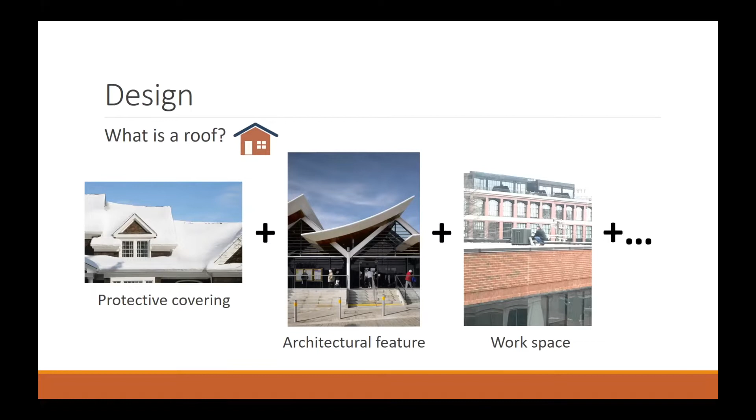Let's start off a little bit more with some background information and just talk about design. That's what the focus of this presentation is primarily, it's about design and how we see design and its impact on our lives.

First of all, we recognize that design is a powerful ability where we can build wonderful things, whether it's the Empire State Building, the Golden Gate Bridge, or Hoover Dam. Wonderful things that we've built throughout our country and our society that benefit us in many different ways. We have the power to do many things through design.

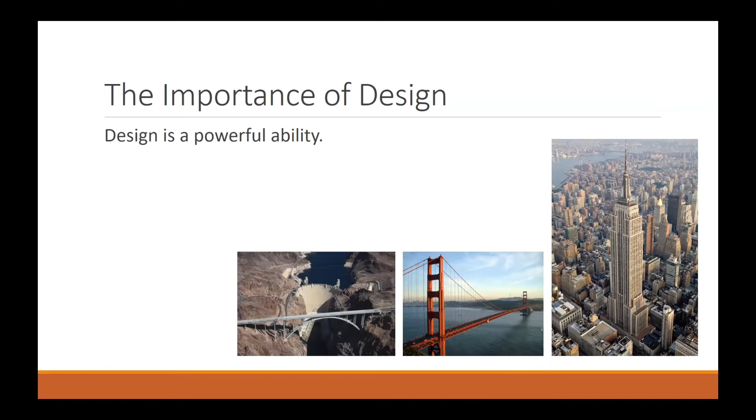Along with that, we have to realize that good design demands attention. As you can see in the photographs, the designs perhaps are not the best designs, right? For the homeowner, that driveway is a little bit steep. For those stairs, it's very hard to see the stairs, so they're fairly dangerous. Or the air intake is right next to the exhaust, and you wonder who designed that. A little quote there from Francis Bacon, but predominantly we need to recognize that if we don't think about our design, something could go wrong. So we need to pay attention. If we don't, we will create designs that don't work or perhaps are unsafe for us.

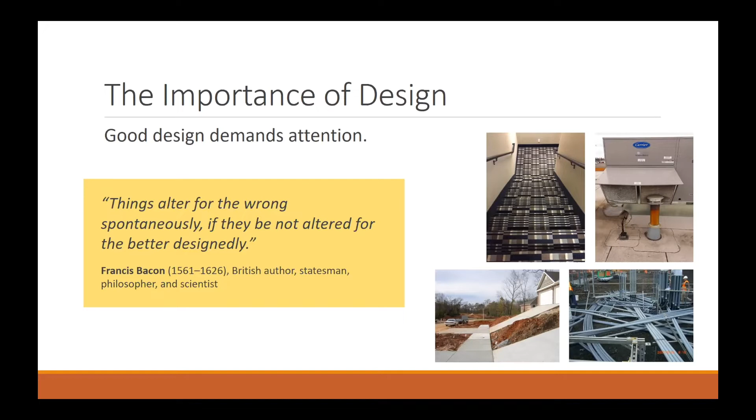Next, we also have to realize that design influences project success. How we design our building or a bridge or a road, whatever it might be, impacts the success in terms of cost, schedule, quality, performance of that design, safety, and so forth. The ability to influence that project success, as you can see in the chart, is very high early in the project during conceptual design, detailed design, and so forth.

Later on, we have less ability to impact project success. Also, the cost of making changes is greater later in design. If we are going to change the design to improve it, the cost is going to be greater if we are in construction or later on after construction.

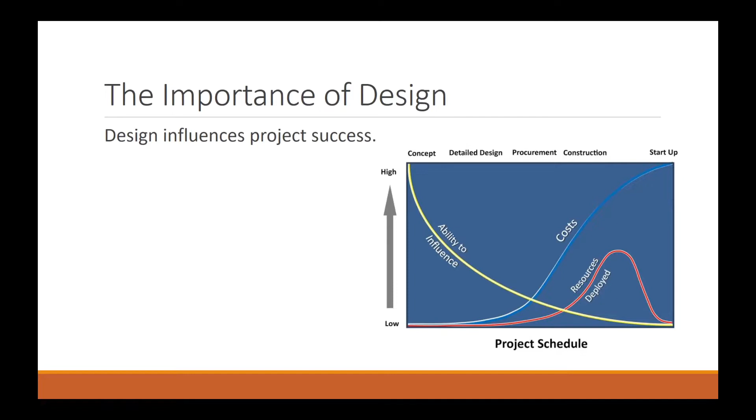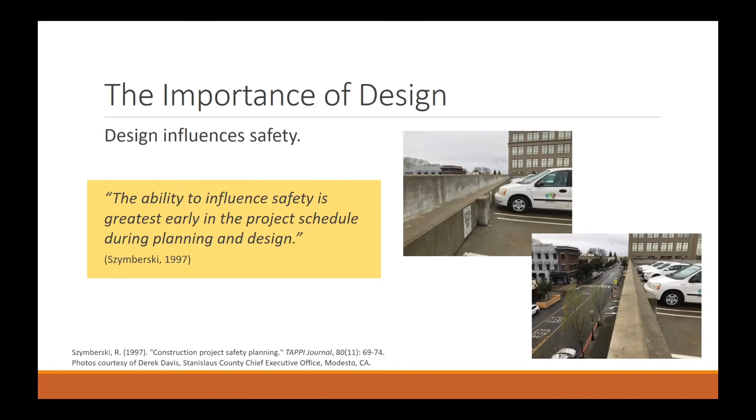In that vein, design influences safety as well. As you can see in the quote, the ability to influence safety is greatest early in the project schedule, during planning and design. As you can see in the photos on the right, this was taken from the top level of a parking garage, where on one side of the exterior wall is the street down below, and on the other side is perhaps a place where someone could stand, a little child or anybody, and be exposed to a hazard down below. So that falling hazard is created due to that design. An example of how design influences safety.

That brings us to this concept of prevention through design. This topic has been around for a number of years. NIOSH, the National Institute for Occupational Safety and Health, has put together a definition to recognize what prevention through design is. NIOSH focuses on all industries, not only design and construction, but agriculture, mining, manufacturing, and so forth. So this is a very general definition, but it's basically the effort to design out hazards to workers before they exist. We're going to look at the facilities, the methods, the operations, processes, and equipment, before they are there on the work site or in the workspace, and design them out.

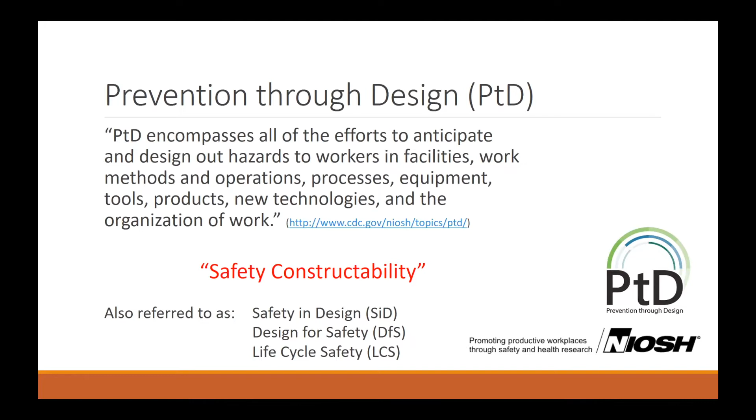I call it safety constructability for the construction industry. You can also read about it in terms of safety in design, design for safety, life cycle safety. Those are similar terms we've heard over the years. So prevention through design is not a new concept. In fact, it's been around for many years.

Here's an example. Perhaps you've visited this site in Wales. It's described on the World Heritage website, listed as one of the World Heritage sites: the Pontcysyllte Aqueduct and Canal in Wales. You can see a couple pictures of it there and some original drawings. What did they do on this project? Well, the documentation describes that the engineers gave unusual attention to the safety of the workforce. They designed in wider piers so that workers could get around the work site a little bit easier, and they also designed the upper sections to be hollow so that they were a little bit lighter and could be handled a little bit easier.

So we've had this concept for many years, and we understand what it is. It's being implemented now, obviously, but maybe not to the extent that we would like. We are trying to develop resources and things to help the industry implement this concept.

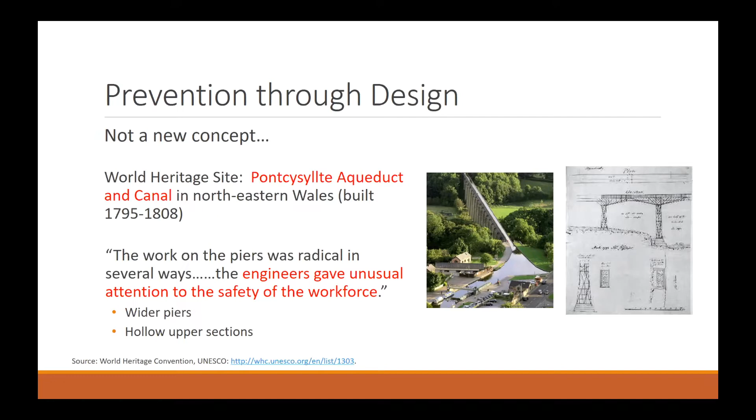Importantly, we have to recognize also what PtD is not. When I give presentations, people always talk about means and methods, and architects and engineers participating in safety during construction and responsibility for safety. Well, what PtD is not is those three things. It's not a suggestion that architects, engineers, or designers should participate in safety during construction. They're not there to provide that guidance to the contractor or the workers, and they're not prescribing the means and methods of construction.

That's up to the contractor, rightfully so. They have the contract for that, it's part of the contract, and they have the knowledge, right? When I was an engineer, I didn't do that. When I was a student a long time ago, I wasn't taught anything about safety on construction sites. So it's also not something that suggests the architect and engineer bear a responsibility for worker safety.

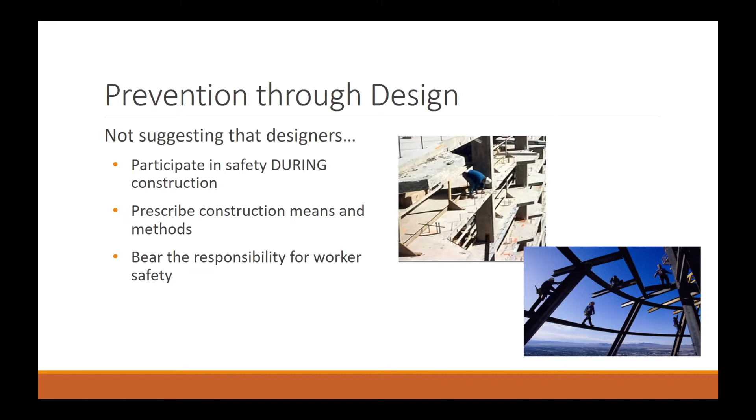It's simply, as I design something, think about how that design impacts the people who are building it, maintaining it, using it, all of those, and maybe change the design in a certain way so that it's as safe as possible for those three parties. So it's basically making safety pre-thought, not an afterthought, as we see in this figure here, moving it back upstream to design, to the conceptual design, detailed design. It's easier to do it at that part of the project, and it costs less.

Now, that's not to say that there isn't an important part for safety during construction as well.

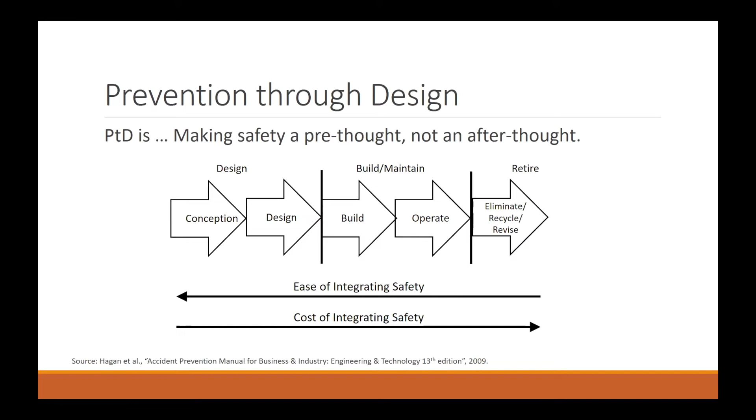There certainly is a big influence on safety as part of the contractual requirements and as part of the work operations. So there's a big impact there, but we also have an influence of the design on safety too that we have to address, and we can promote better safety during construction, during use, and during maintenance of our facility.

There are a couple important questions that may come up, and I wanted to address those: what is being designed, and whose safety is being considered. As you can see in the table on the left-hand side, there's a list of things we perhaps design: the permanent structure or equipment, or maybe the temporary structures or the process of constructing, and the equipment we use during construction.

On the other columns, we focus on whose safety we're targeting. Is it the safety of the constructors, the safety of the end users after the facility is built, or the safety of the maintainers, or all three?

I wanted to address this quickly to focus the discussion on where we're struggling and where we need to put more attention. First, we need to recognize that the end users, operators, and maintainers don't really get involved with the temporary equipment, the temporary structures, and the construction work process, so that's not applicable.

The end user and operator are very much affected by the permanent works, the structure, the facility, the equipment. We actually do a good job here—we have building codes, lots of standards and regulations. That covers the safety of the person in the building after it's built, driving across the bridge, or working in that industrial plant.

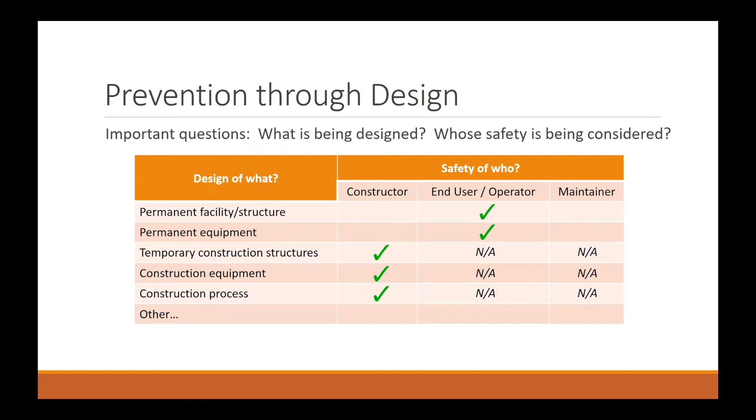What we don't do a good job at, and where most research focuses, is designing the permanent structure or equipment for the safety of the constructor or the maintainer. That's where most of the research going on today is focusing—how do I design a column, the rebar, or the layout of my facility to make it safer for those who build it?

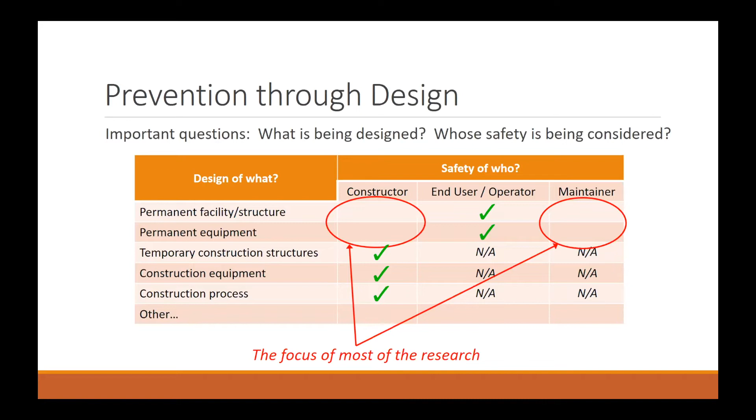As part of its life cycle, the facility impacts people differently, whether partially built, in its final form, or when it has to be maintained. That's where I get involved in much of my research, and where, if you read some journal articles, people are targeting. Let's dig a little deeper into that—I want to show you some examples.

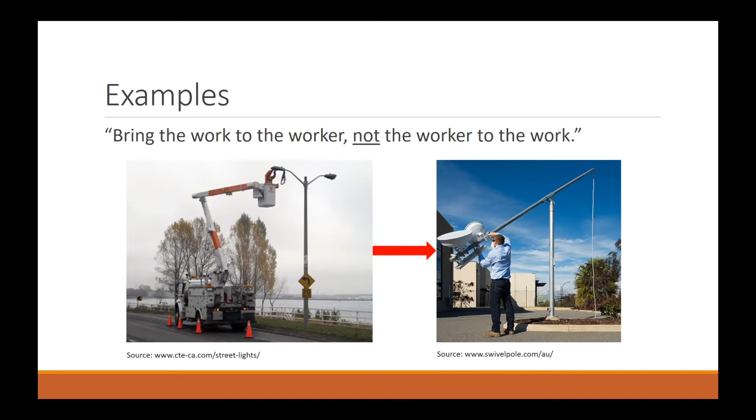Maybe you've seen something like this. It's fairly easy to recognize: bring the work to the worker, not the worker to the work. As you can see, the worker is up in the man lift trying to replace that lamp, which creates a hazard—there's passing traffic, plus being up in the air at elevation. Why not design that lamp post to rotate down, so a worker can simply change that bulb right on the ground? That's a good example, and it can be applied to lamp posts or any type of work or design within our facility.

There are quite a few other examples. I'll show some pictures here, like color-coding the piping in the upper left, so we can readily see what's in the pipe. If I'm doing work during commissioning, some rework, or maintaining that facility, I can easily tell what element, liquid, or gas is in the different pipes.

The center one there is something I call mistake proofing, or poka-yoke, and that is designing something so it can only be used in the right way. We can only put that plug in one way.

In the bottom picture there, the red concrete, so that later on, if we are doing some work in that area, we uncover the red concrete and we know that there's some type of a utility hazard in there. So we stop and we don't continue unless we know that we have turned off the utilities or protected our workers.

The very right one there is a very useful resource, about steel design and how I can design that steel to cover up that dangerous corner, that hazardous corner on that gusset plate. Either cut it off or cover it up with that angle. So quite a few examples are available, and checklists and things that are available online.

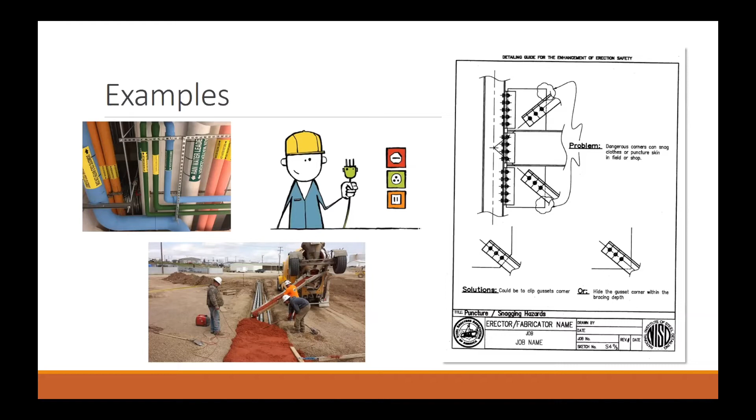If you'd like, I can point you in the right direction to find those. What is this founded on? The foundational support for this comes from something called the hierarchy of controls. If you have a background in safety engineering or safety management or safety science, you've probably learned about it. It's basically saying, if we have a number of controls, which one's better than the other? Is there a difference between types of controls?

At the very bottom, we can put on personal protective equipment. We can put on a hard hat and steel-toed boots and a safety vest. But maybe better than that is we change the way people work. That's an administrative control, so we change the process. Or maybe we put up a sign to warn people so that they don't walk in a certain place, or maybe they don't step on that top step of the ladder.

That's an administrative control. Above that, a little bit better, is what we would call an engineering control. We're going to isolate people from the hazard. So that's that guardrail around the skylight, or that grating over the skylight. That would be an engineering control. The hazards are still there, but we are protecting people from that hazard.

Above that is substitution. We're going to replace the hazard, make it a little bit less hazardous. And at the top of the hierarchy is elimination. We're going to remove that hazard altogether. So that would be that building on the right-hand side there without any skylights at all. And maybe that's okay for your building, although maybe you want skylights in your building.

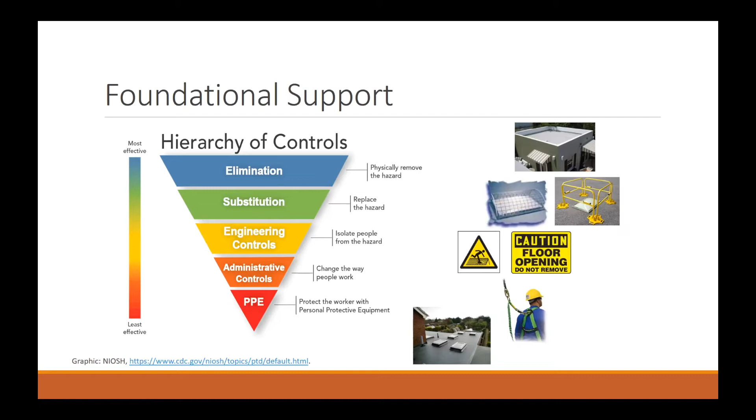There is some industry support, and perhaps some of you have seen this if you're involved in the LEED accrediting system. USGBC has a prevention through design LEED pilot credit that's available. It has two different parts: a safety design review and a safety constructability review. The safety design review is focused primarily on the safety of the end user and the maintainer after the facility is built. The safety constructability review focuses on the safety of the constructor during the life cycle of that facility as it is being built.

How can that design affect the safety of the people who are building it? So I encourage you to take a look at that and perhaps include it in your projects as well if you're going for a LEED rating.

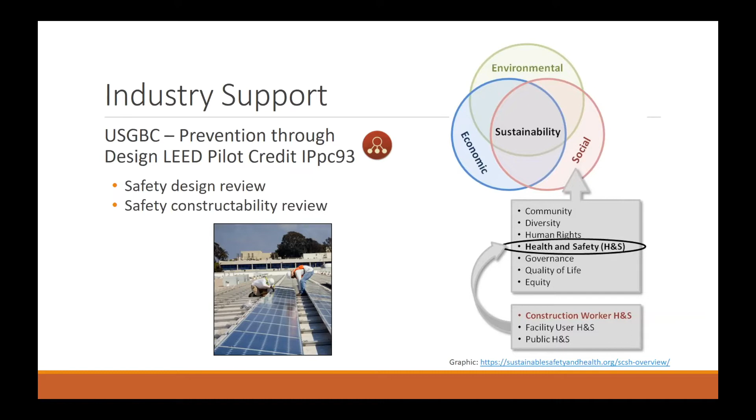There's more motivation as well. In research, we try to identify the potential impact of design on safety, injuries and fatalities. That's a little bit of a hard thing to do. We talk about what we do during design and try to relate it to the safety of the worker and the injuries that occur. There are many things that go on in between, many different safety practices. So it's a little bit hard to filter out, but we give it a try.

We don't know exactly what that is, maybe 20%, maybe 60%, but in that range, perhaps. Still, 22% is a good portion when we're talking about injuries and fatalities. If we were to eliminate that many injuries and fatalities, that would be a very significant impact to our industry, and a very positive impact.

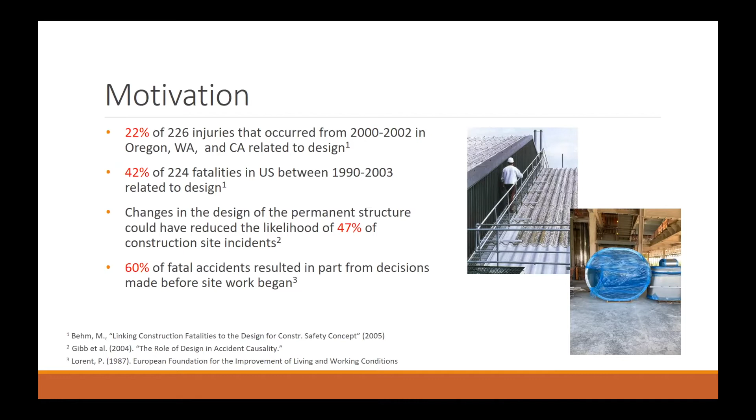So we know that there is an influence by the design on safety during construction. That HVAC ductwork there on the right, just to mention that, so an oval piece of ductwork rather than round. So when it's sitting on the site there, as you can see, it doesn't roll over, and there's no hazard that workers are exposed to from that potentially rolling over on them.

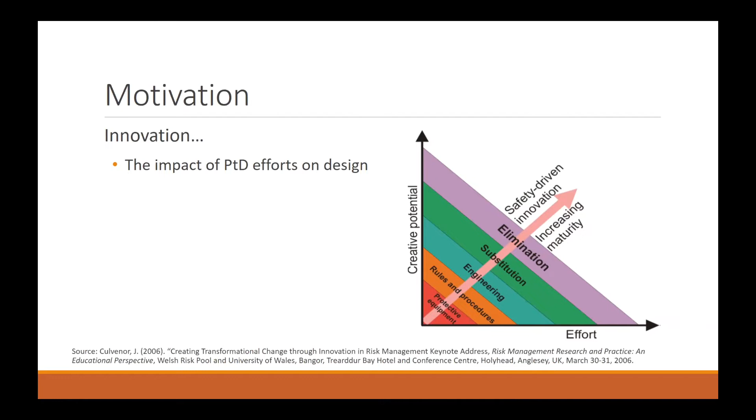And if you think about it, if I've got a challenge, I'm going to put some time and effort into it. I'm going to think of how to do it differently, and I'm going to get an innovative design. So aiming for prevention through design has led to these new ways that we design our buildings and our bridges and so forth. Okay, so that's all about PtD.

Let's look about what's been happening in practice and what we've learned about practice. And I want to focus on 4 different areas: inhibitors, enablers, resources and tools, and measures of effectiveness. So this is now as you move forward in your own world and you try to implement PtD, what are the things that you're going to be faced with? What should you use to implement it? How are you going to measure whether you're doing a good job or not?

So first one is inhibitors. We often talk about what's hard about PtD, and that's where these inhibitors come up. And I purposely use the word inhibitor rather than barriers, because barriers identifies, in my mind, something that prevents PtD from happening. And we know that there are many organizations and projects that are implementing PtD. So I would call them inhibitors that maybe slow it down, but not prevent it.

And so at the top of the list, designer education and training. Here in academia, we struggle with that, is educating our engineers who are going to do the design about safety. So we are working on that. Training them on the site. What's the impact of their design as they walk around a site, get them that construction experience so they learn about the hazards so that they can address those in their design.

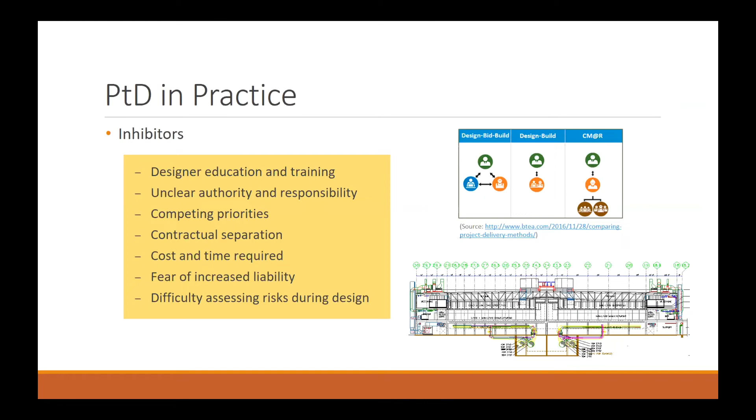And then it's difficult. Perhaps you can see the figure on the bottom right. That's a cross section of a microchip manufacturing facility. How do I know what the safety hazards are if I'm just looking at that on my computer screen? It's perhaps difficult. There was some research here that was done, reported back in 2015, where they did a survey of people out in practice and asked them, what are the impediments to prevention through design implementation?

Lack of knowledge and training, that's a big one for sure, and that's why we have the webinar, right? I'll give you the answer here, I'll spill the beans, make it easy for you. So 1, 2, 3, 4, 5, and 6, and there was a tie there, and then number 8.

So number 1 was financial incentive, right? What's in it for me? Why should I do this? I don't have to do it right now. I'm not required to per contract or the building code or OSHA or anything like that. So why should I? Secondly, lack of regulatory requirement, right? And then thirdly, lack of recognizable duty. The relative index there has to do with the relative difference between one impediment and the other.

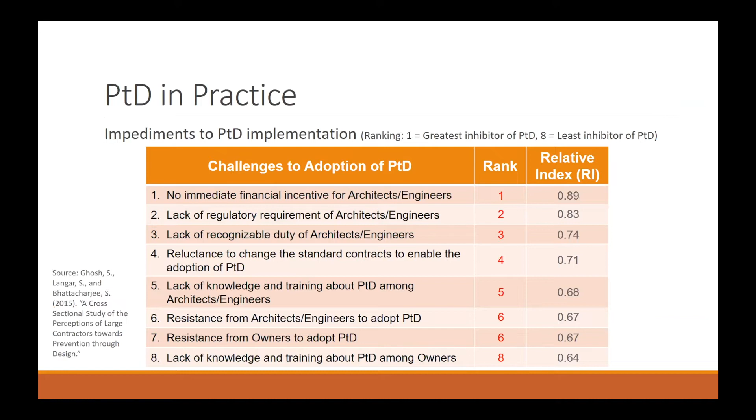They're fairly closely spaced, so they're all very important, but number 1 is the financial incentive for A&Es. Let's focus on what helps us out rather than inhibits us. What helps us in PtD is if I'm committed, right? I've got an owner, I've got a designer, and they're committed to safety, they've got a good safety culture. If the owner or client tells me, as an architect or engineering firm, that on this project I would like you to consider safety in design, I will respond and provide that service to my client. I will need to have the experience and the training or education. So that's a benefit, an enabler.

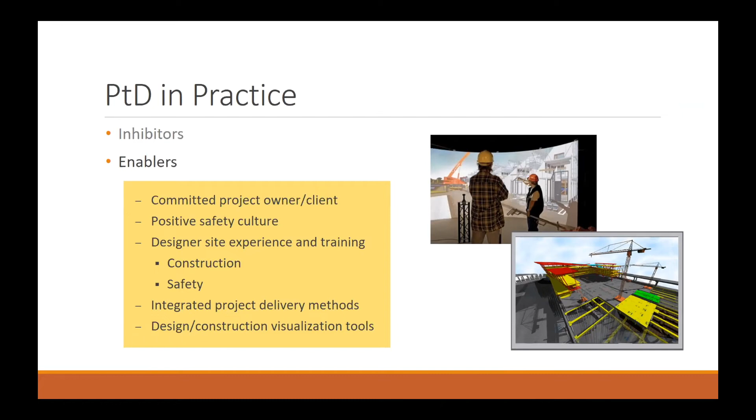Two types, one in the area simply of construction - how do they do the construction, what are the operations, knowing the construction process. And secondly, the safety involved in that process. If I understand what the hazards are, then I can design them out. If I use an integrated project delivery method - design-build, CM, IPD method - that helps, we found. And then also if I use some visualization tools, some type of 4D CAD system, VR, augmented reality.

There are quite a few checklists that are available. There's risk assessment pro forma, these documents that can be used to assess risk, BIM tools, databases, risk design risk calculators. Risk mapping is a process where you look at a map or plan of the facility and identify the risks. So those are available, and I encourage you to use those as you move forward with PtD.

Lastly here, when we do implement prevention through design, how do we know we're doing it well? That's where these measures of effectiveness come in. These haven't been developed so much, and we're starting to try to figure out what we should focus on.

Perhaps we focus on the percentage of procedures designed that take safety into account, or the number of safety needs detected in design. As perhaps some of you, if you're on the design side, when going through the design process, you have a design log with comments from people. You do peer reviews, value engineering, constructability reviews, and you create this log. Well, how many of those focus on safety during design, during construction, during use or maintenance? And then how many of those actually change the design to eliminate the hazard, rather than just saying, oh, we'll let the contractor figure that out - that's not our world, that's something for the contractor to worry about. So we can use that number or percentage as part of measuring the effectiveness of our program.

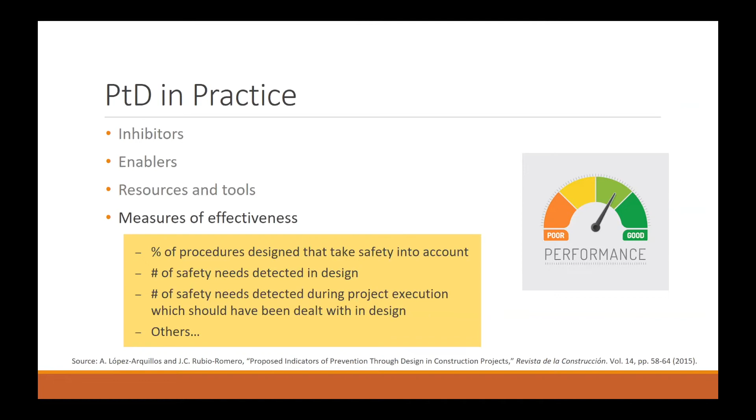There are quite a few others. There's a reference down there at the bottom that you can look at to identify what you might use for evaluating the effectiveness of your PtD process. Let's give it a try, and here are a couple pictures here.

Let's put into practice what we've learned. The question here is: what design-related safety hazards do you see in these images?

On the left-hand side, you can see a building being built. You can see the metal deck, the rebar, the columns going up, and it's ready perhaps for the concrete to be placed. On the right-hand side, you can see the utilities being placed below. This is going to be a mat slab, so they're roughing in all the utility lines for that.

As you look at those images, can you see any design-related hazards? I've shown these to people before, and they definitely see hazards. For example, on the left-hand side, maybe that rebar—you can trip on it. That spacing and size of the rebar is a design choice. Rather than the 10 or 12-inch spacing there, maybe we use a welded wire fabric or something where the spacing is less, and smaller size rebar, so that it's easier to walk on. That would be a design-related hazard on the left image.

On the right side, usually when I ask people about design-related hazards, they say, oh, look at that shovel right there—that's a tripping hazard. And then I say, well, let's focus on design-related hazards, not construction-related. They scratch their head a little bit, and usually they come up with the layout of that piping. Does it have to be laid out that way? Can we organize it a little better so that during construction it's not such a plate of spaghetti, and easier to walk through? So there are some design-related hazards there.

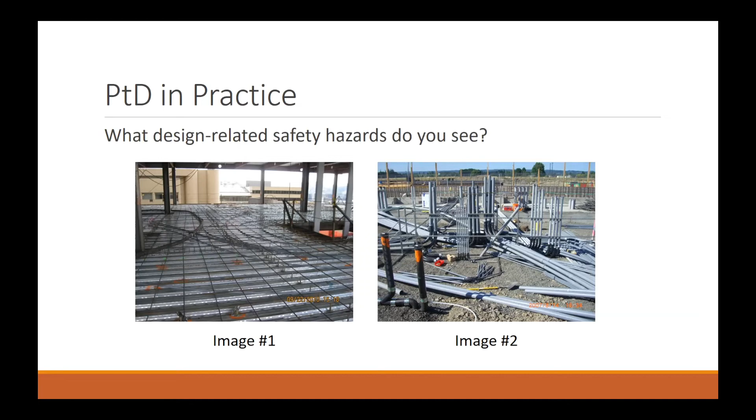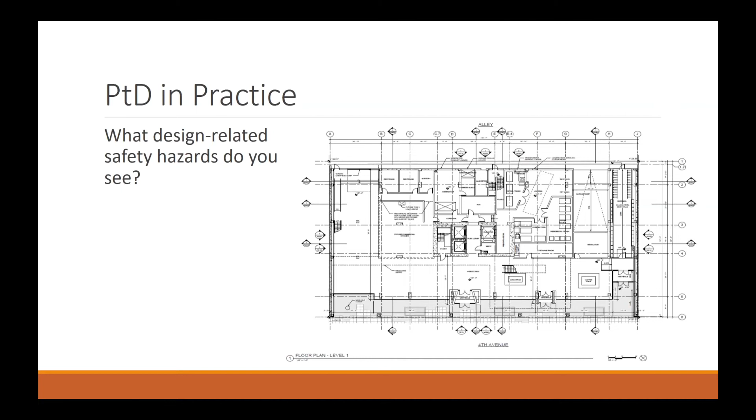What we found is that if we have an energy mindset, we can look at a design and think about where the energy exists. And when we identify where the energy exists, we can then identify the hazards. We've done some research that relates the amount of energy to the severity of an incident or injury, and there is a correlation there—more energy, more severity of the incident. So following the energy is one way you can prompt yourself to identify those hazards.

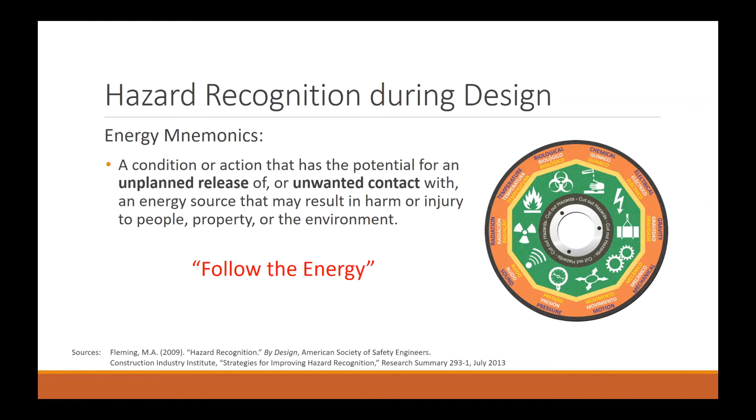Are there openings? Can I make the openings smaller? Can I put those openings somewhere else so they're not so dangerous? These guide words are designed to help an architect and engineer think about their design in certain ways and focus their thinking on what the hazards might be during design.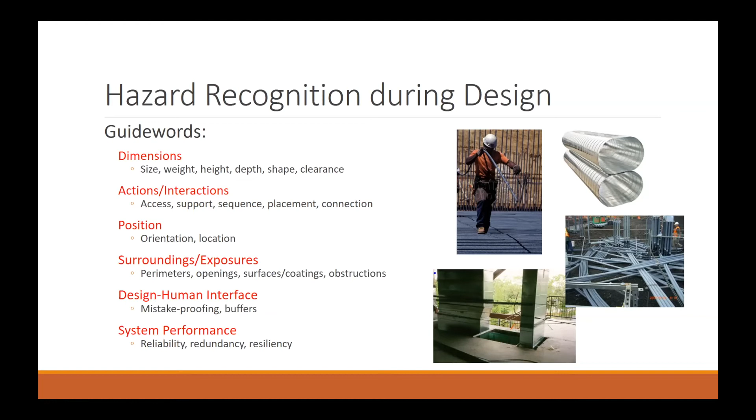We can also use another tool that is very helpful. I participated in a research study where we looked at the concept of visual literacy and how it can be used to improve our ability to see things, in this case, to see hazards. There's a lot of work going on these days into improving visual literacy, where I look at an environment. That environment can be my physical environment around me, or it could be any type of data—a photo, a chart, a table of information. How do I look at that information or that environment and improve my understanding of it?

As I apply it to what we're talking about, we look at our design and ask ourselves: what do you see? What does it mean? And then what do you do about it? That's the visual literacy concept. If you've gone through training on visual literacy, you learn about concepts of design—color, shape, orientation—how to physically look at a picture and gather all the information you can from what's being presented. So perhaps in your organizations you can go through some visual literacy training, and that will help your people understand what the hazards are as they go through their projects and designs.

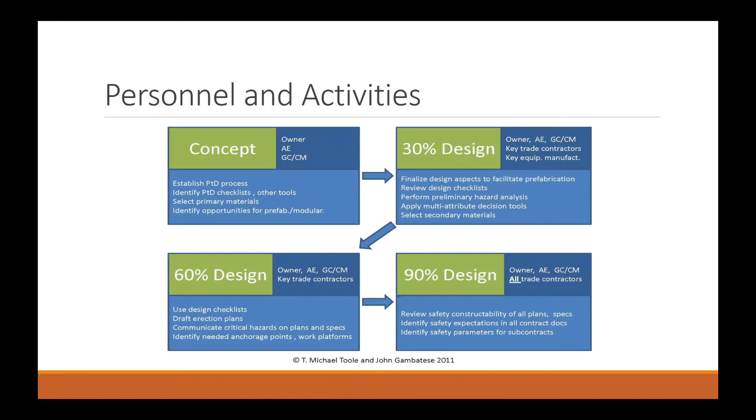I recommend predominantly during the design, if your contractual method allows, to incorporate those lead subcontractors—the mechanical sub, the electrical sub. Those people really know what the hazards are; they're exposed to those hazards. So I recommend that you incorporate them as much as possible.

I had the opportunity to go to the UK and study what's happening over there. They're very much ahead of us in terms of prevention through design. They actually have some requirements, some regulations that say anyone doing design has to address the risk to anybody downstream of their design. We don't have that in the United States in terms of construction safety.

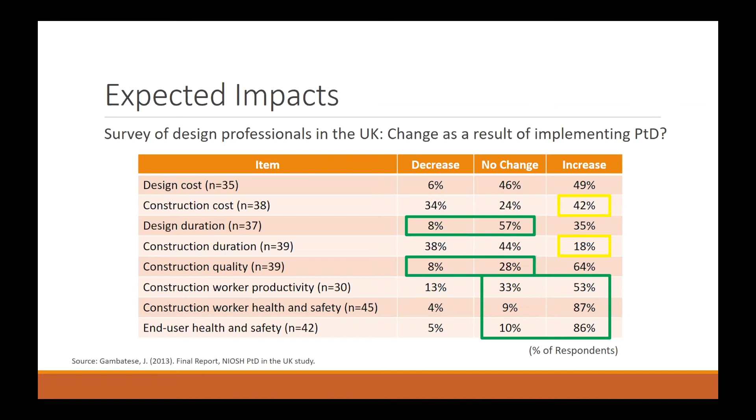I'll focus on a couple that I think are of interest: construction cost and construction duration—we'd see a little bit of an increase there, according to some percentage of the people we surveyed. Many said no change, some said it would decrease. What we'd like to see is design duration and construction quality—there's no change, or maybe some increase predominantly, but no change there. Also importantly, we'd like to see productivity increase, which we found out, as well as construction worker safety and end user health and safety. So there are some benefits, but also perhaps some cautions there.

Okay, with that, let's talk about PtD in the future. What do I see in terms of what's going to happen in the future? How do we move forward? What are the things that are being worked on?

One of the things we hear about a lot today is artificial intelligence—we hear that AI term quite a bit. So there are efforts going on to utilize AI during design. As I perform my design, do we have some type of technology that can evaluate my design as I go through and develop it? That evaluation process will provide information about the safety hazards created during the design, and that's got some legs to it—it's in the process. Part of that process is figuring out, okay, if I design a concrete column, what are the activities involved in building that column?

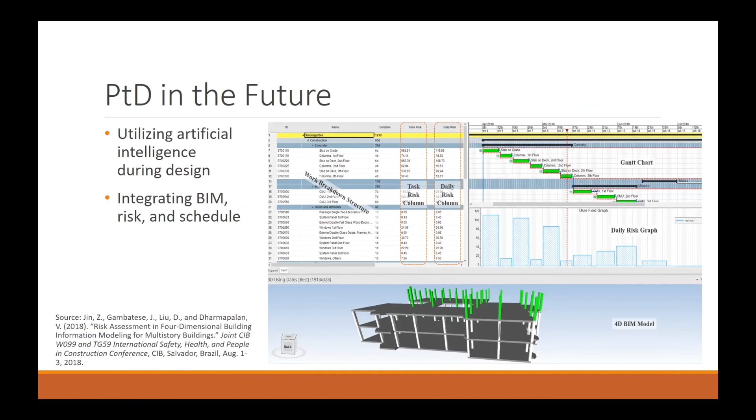And then attach a risk rating to those design elements so that we could create a risk graph. That's the one in the middle on the right-hand side there, looking at what's the safety risk during the course of the project. And then if we know that, we can either design it out beforehand, redesign our schedule, or maybe provide some training or safety precautions at different points of that project. So that's integrating BIM, risk, and schedule. And those tools are becoming available for us.

And that's it for my presentation. I hope you learned something about PtD, and I'm happy that you're here and interested in it. I would be happy to answer questions or provide additional information.

John, that was so fantastic. Thank you so much. We have a question here from Dwayne Caldwell, and he asks: I've found that most architects and many engineers know the building mechanical and fire codes, but are not familiar with OSHA requirements. I've had architects design to IBC, but many OSHA requirements are more prescriptive and restrictive. The architects state IBC trumps OSHA - how's that for a bunch of acronyms, right? Which we know is not true. This leaves the owner responsible to retrofit a brand new building or project space immediately after construction to comply with OSHA for occupancy and use. Here's the question: how do we educate architects and engineers to consider OSHA equally with ICC?

Yeah, that's a gap that you've identified, Dwayne, and also something I've looked at in the past. On one side you have the IBC, which if you read through it, much of that focuses on the safety of the person who's going to exist in the building afterwards. Then on the other side you have OSHA - if you read through the OSHA regulations, they're not very exciting, but they focus on the process of construction, and they don't have a lot in them about the permanent structure. So there's a gap there in terms of resources and available information.